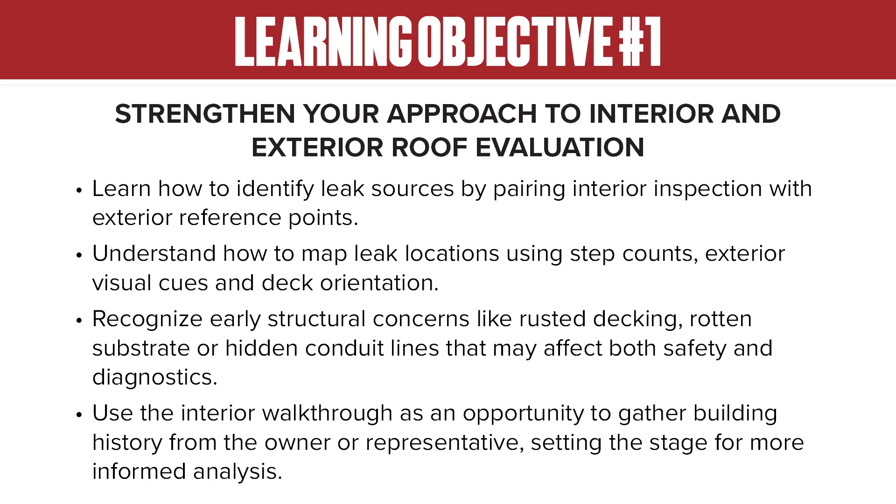So we're going to start with learning objective number 1, how to strengthen your approach to interior and exterior roof evaluation. So Lane, what are the first steps to properly analyze a roof? Yeah, this is the most important part of any opportunity that you may have to go and look at a building. So if someone gives you a call, and this is obviously for existing buildings, and you get an opportunity to come out, typically there's probably a leak or something going on that the building owner has reached out to a contractor or somebody to determine what's going on.

So initially, a lot of contractors may come to the property and they want to go straight to the roof. That is not what you should do. From the get go, you always want to walk the underside of the building first. If there's drop ceilings and things like this, you may have to ask if you could actually pop your head up and pop a ceiling tile. You really would like to see the bottom side of the deck as well.

But during this inside inspection process, you're going to try to determine where the leaks are coming from. So typically, if there's 1, 2, or 3 different leaks, you want to determine that from inside the building, and you're going to walk off in steps from 2 different walls to help determine where that roof leak is once you go to the top side of the roof. So really try to get some sort of visual. You'll have a pad and paper, and you're gonna walk out your steps, maybe 10 steps from one wall, 15 steps from another wall, and you'll put an X there.

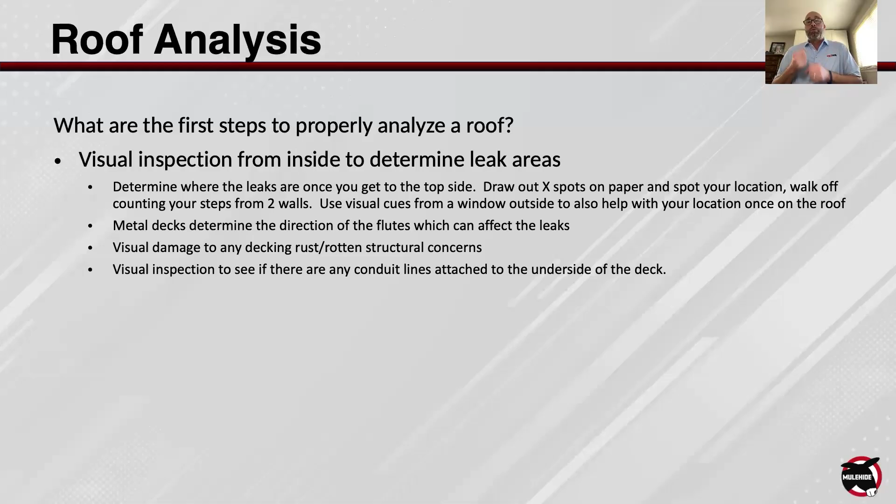So if we're doing some sort of a re-roof scenario, even when we're tearing off and we're going to mechanically fasten back down into that roof deck, the last thing you want to do is run a screw or something through some conduit lines and things like that. Yeah. So these are all the types of things that you can determine before you even get to the top side of the roof. So visual inspection from underneath the roof deck is key, and the first thing you should always be doing. I love it.

That's such good advice. So how do you map those leak locations once they're found? Step counts, exterior visual cues? Some of that internal information you should know. Yeah, that's where the hard part could be, trying to get close from the bottom and then taking that information up to the top. Stepping off from two walls will at least get you close. Okay. The next thing you can do is, if there's a window or door, within the sight lines of where this leak is, look outside a window and try to get an object that you can see from the rooftop.

Maybe if there's a really nice Corvette sitting out there, and it's in the sight line for where that leak is, then that'll also give you a visual. Once you get to the rooftop, you can always look outside, and there'll be potentially a tree, a bush, maybe a sign that's going to help you determine that, hey, I'm on the right line. That's my outside cue. I have my roof steps stepping off from the two same walls. Once we get to the rooftop, we're gonna take those steps from both those areas, and that should put us hopefully within reason to start assessing what could be the issue and where's the leak source.

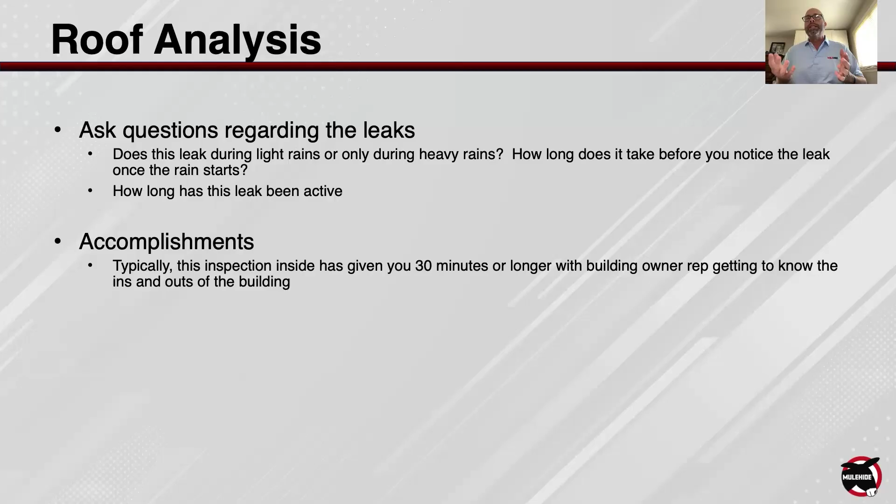Those would be areas where obviously you would see potential signs of rusted metal, rotten decking, things of that nature. So that's easy, but to get a real thorough exam of the entire underside of the roof deck could be difficult. But those are the types of things; again, asking a ton of questions to the person that's walking and escorting you around should give you some cues and signs to determine what's going on with this roof.

And once you've identified the roof deck itself, you should be able to understand and know where you may have those potential areas of issues. Got it. Amazing. Okay. So once you're on top of the roof, let's talk about where those leaks usually are, like around the perimeter edge walls, penetrations, curbs, all of that. And talk about once you're up there, what are your next steps?

Yeah, absolutely. So now that you have all of this knowledge from below, we're going to take this to the rooftop. Now, if you're going just to evaluate a specific leak, then you can simply go leak hunting at that point in time. However, you're up there. You might as well take a look at the entire roof while you're there. And then you can also still do that leak investigation, whether it's 1, 2, 3 leaks, whatever. But ultimately, all roof walks should always start at the perimeter of the building.

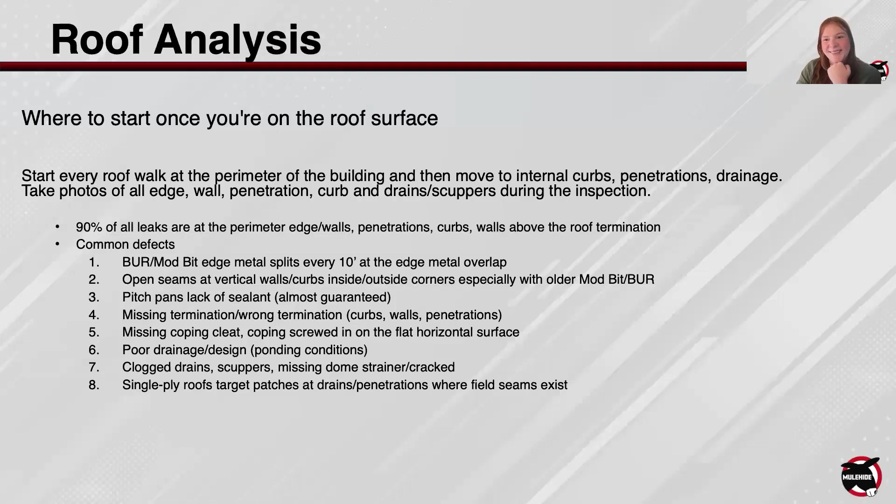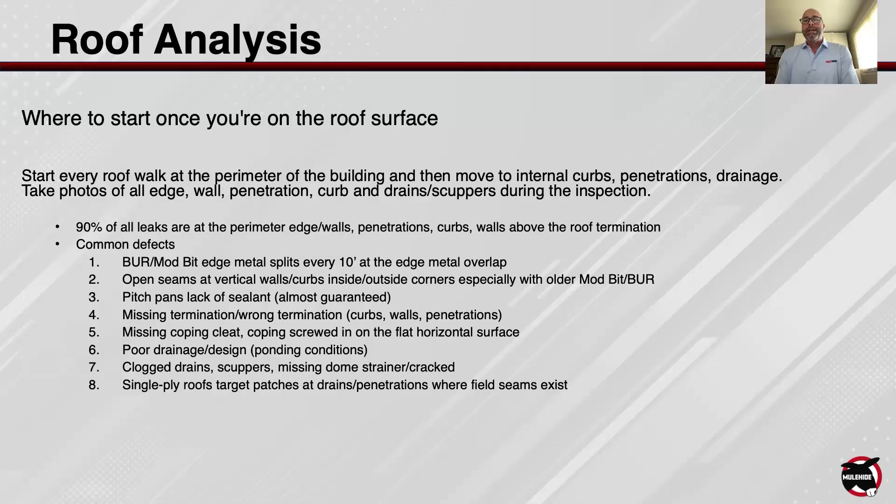Another one that goes along with that is clogged drains. If you're ever on schools, you're going to find every single sort of ball that is out there to mankind, and they all find the drain. So baseballs, soccer balls. The soccer balls are not going to go down the drain, but the big old school rubber balls are up there. I mean, you'll find any and everything. I recently heard about someone finding a raccoon in a scupper. Sure. Any and everything. It's amazing what you'll find up there.

So check those. The easiest fix there is to fix some things, but a lot of times it may just be the strainers themselves, the domes. Those are simple and easy repairs. Again, we're just pointing out potential issues. Some other things, again, more universal in terms of manufacturing requirements, but just target patches at the right areas where they're needed, things like that. These are all pretty typical, but there's multiple things that you potentially can find.

Every time you get on a roof, there's a new opportunity. Yeah. And it's amazing what you will find when you get up on the roof. We've seen full-blown gardens growing up on the roofs, right? So just be prepared for anything once you actually get to the rooftop.

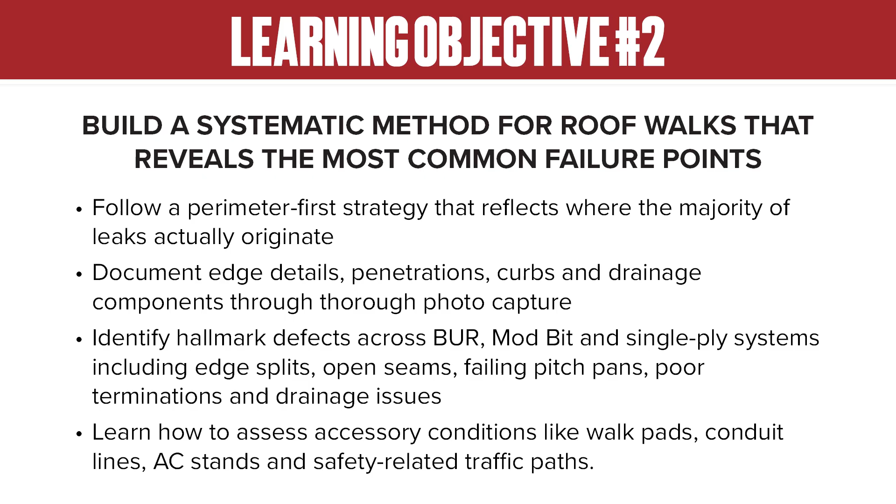Absolutely. And that's all a part of Learning Objective 2, which is building a systematic method, but like Lane, you just said, you can have that systematic method for every roof walk, but there might always be something new being thrown at you that you're adding to that method. You're adding to that list of things to check. So once you've walked the perimeter, you kind of have your system and your method down on that aspect. What's next? Yeah, so now we're going to move more into the field of the roof.

Got it. And there's all kinds of potential issues there as well, but this would be more related to the membrane itself or just potential little details that you may notice. Again, typically you're not going to find leaks per se in the middle of the roof. If the install was done correctly, you're typically not going to find that. But you can still find potential issues with the existing membrane, whether it's a built-up roof, gravel, modified, existing single plies, whatever.

So some of the things you're going to want to look for there is if it's a built-up roof or gravel, look for what's called crazing and or cracks, open seams, punctures, blisters. Again, you could certainly get tears and splits in the field of the roof.

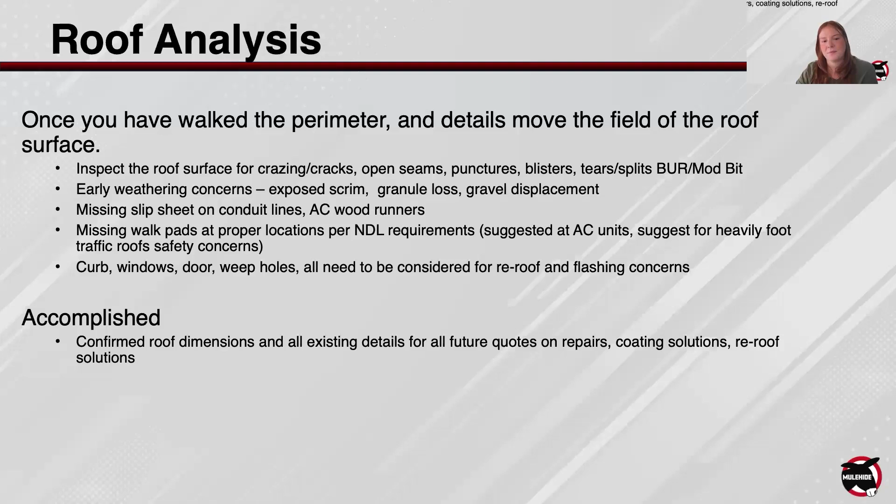I have been up on many gravel built-up roofs. The problem is you cannot see what's underneath that gravel. Right. So if you did the proper inspection from below and you've got your identified leak area and you get up there and you are in the field of the roof, you have to be cautious here because you don't want to create any more damage.

But in order to find a leak, you may actually have to do a little bit of spudding or removing of that gravel and really get down to see what's wrong with that existing membrane. And I found splits within built-up roofs that are 6-7 feet long where the membrane is just literally opened up there for whatever reason. You're never going to see that unless you displace that gravel. Okay. So these are all things you can do.

In terms of membrane, whether it's early weathering concerns, exposed scrim, granule loss on modified, gravel displacement on old school built-up roofs. If it's single ply, typically, if the roof's lived its life and it's 25, 30 years old, it's obviously done its job. It's ready to get replaced. Okay. But if you're on a newer single ply roof and something doesn't look right, then there could be some early weathering issues with that particular membrane. Things like that may happen.

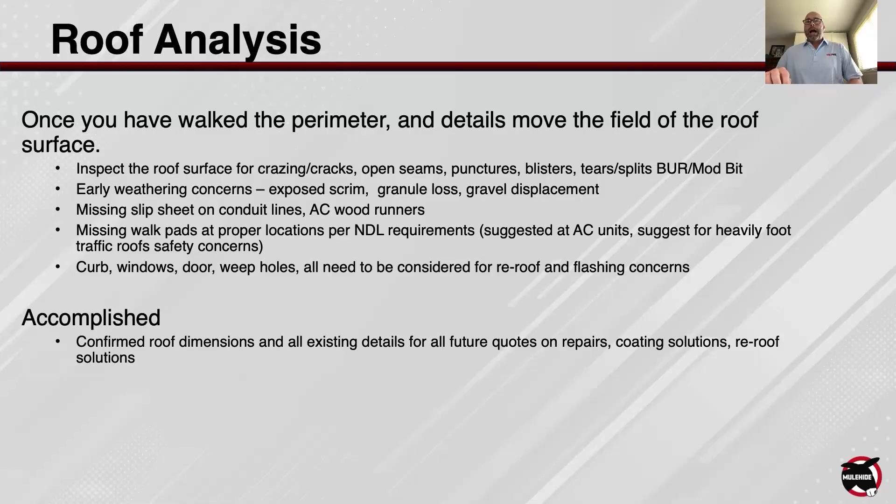I live in Texas, so walking a roof in July, it's not fun. And so most building owners are probably going to say, have at it, and then you come down and tell me what's up. So again, there's a purpose for all of this. And at the end of the day, what you're trying to do is make sure you have all the critical information that now will allow you to start talking solutions. So that's what we've accomplished by doing these 3 initiative walks, if you will: inside, perimeter, field.

It's giving you all of the potential answers to start talking about solutions. Yeah, that is so great. So we covered, like you said, learning objective 1, which is that interior and exterior roof evaluation, and learning objective 2, which was building that systematic method. So starting at the perimeter, going into the field.

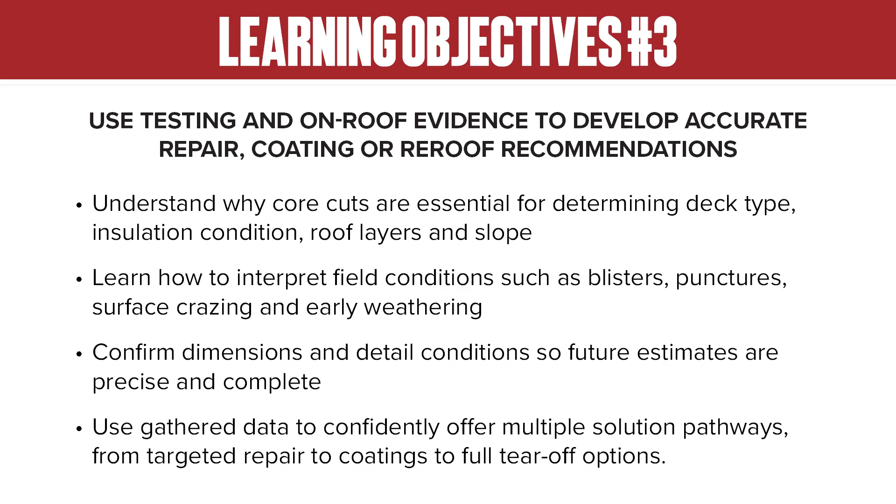And then now we're going to move into learning objective 3, which is using testing and on-roof evidence to develop accurate repair, coating, or re-roof recommendations for that home or building owner in this case. So what are core cuts and why are they essential for determining deck type, insulation condition, roof layers, slope, all that stuff? Absolutely. So with any analysis, a core must be done.

I will urge you to always, always, always be sure you get approval first and ask. You don't want to cut into somebody's roof without approval first. But if they don't give you that approval, then it's going to be hard for you to come up with real good solutions at that point, because it's harder for you to determine what needs to be done, materials needed, and things like that. So when in doubt, most building owners realize that this is necessary, and as long as you repair it properly, you should be good.

So what we're trying to identify here with these core cuts is, again, what is our deck type? So we've done our internal inspection, and we can look from underneath and verify what that is. Right. But you still want to verify from the top side just to make sure there's no anomaly out there or something is going on, right?

Second, this physical type core test will, at a minimum, wherever you take the cores, identify if there's any wet insulation or saturated, if you will. I mean, if you start cutting into a core and literally you get water coming back at you, you can probably stop right there. But essentially you still need to know what's in there, how much, and things like that, because you're going to be tearing all that stuff off.

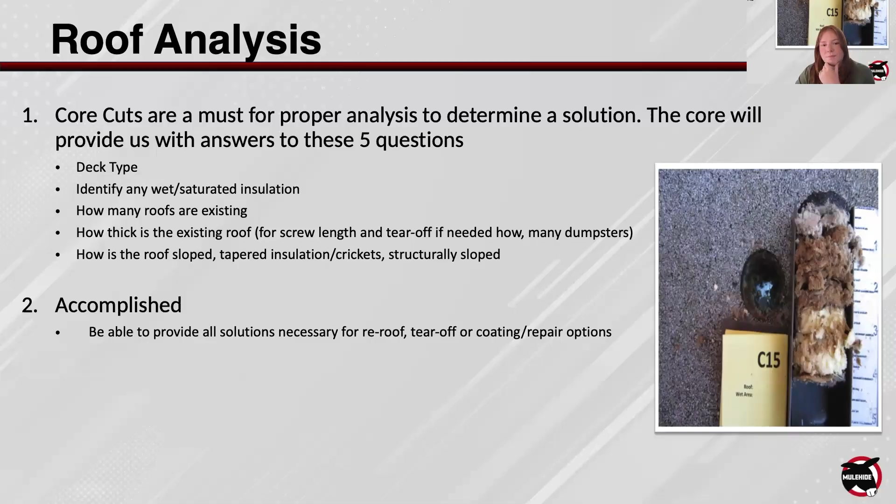So along with your roof analysis, these 2 core cuts will at a minimum be able to give you these 5 criteria that will help you to build whatever that solution is going to be. So it's key that you need to do these to make sure we identify all of these options within the existing roof system itself. Got it. Okay. Huge, massive.

So next, let's talk about blisters, punctures, surface crazing, and early weathering, and what tests can be done to confirm and solve those problems. Yeah. So these pictures are just common potential issues as you're going around looking. Again, wherever you're at, it's hot or it's cold or whatever, these guys are not going to want to get up on the roof mainly.

Right. So put your report together, build these photos in there. So when you sit down, you can show that here's the physical evidence. It's not just me. Here it is based on your roof. Show the core that you took. Show the core cut. I always like to also get the underside of the deck, so you don't just see it.

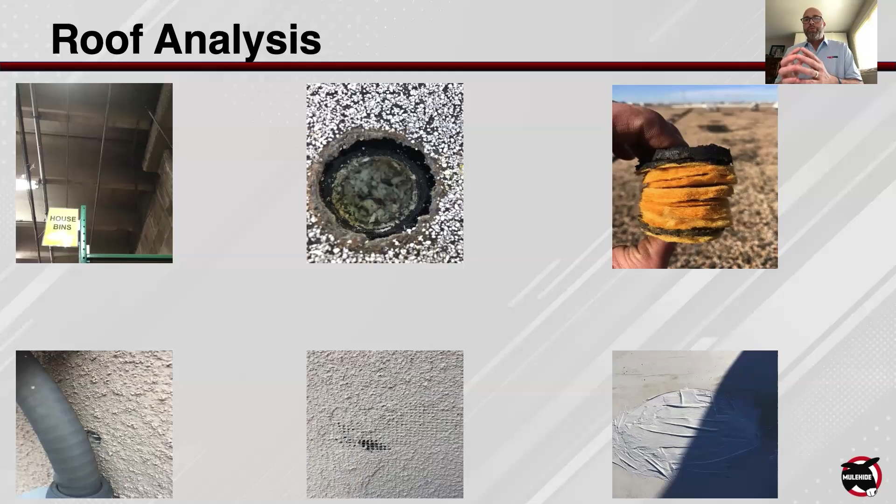Now, a couple of these photos here, you may see this is just in the exterior itself. Leaks can happen, and a lot of times the roofer always gets the call. And doing this as long as I have, a lot of times we go out there and it's something in the vertical wall, or hopefully it's an AC condensation, something like that. Yeah. But these are just all ways that'll show you to look at everything.

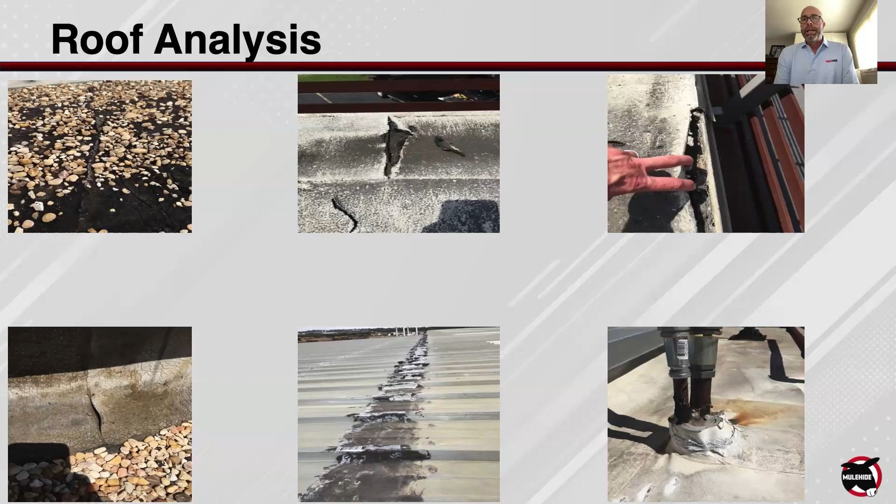Skylight damage. I would love to tell you that your roof's leaking, but no, I'm sorry, you got a crack in your skylight, right? Yeah. So this is something we see all the time too. Again, above the roof. Look, you're up there. If you're a roofing contractor, you're a waterproofer essentially. Yep. You have to understand how the roof meets up against other vertical conditions and things like that.

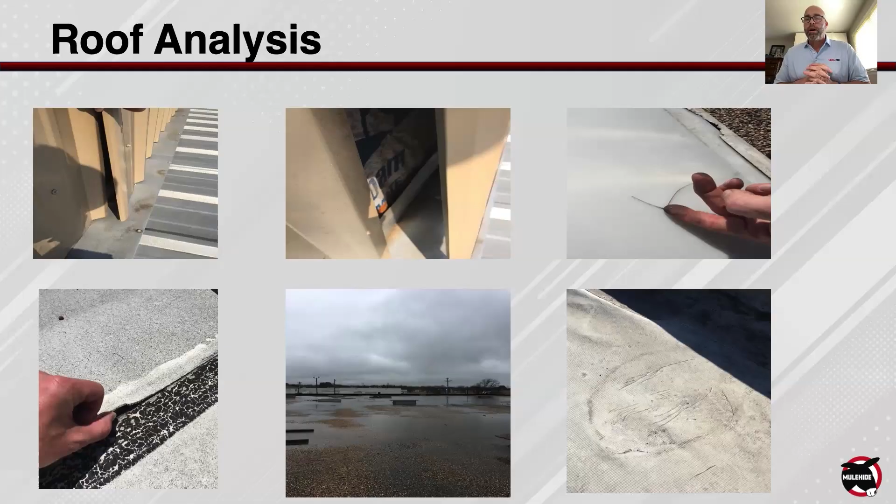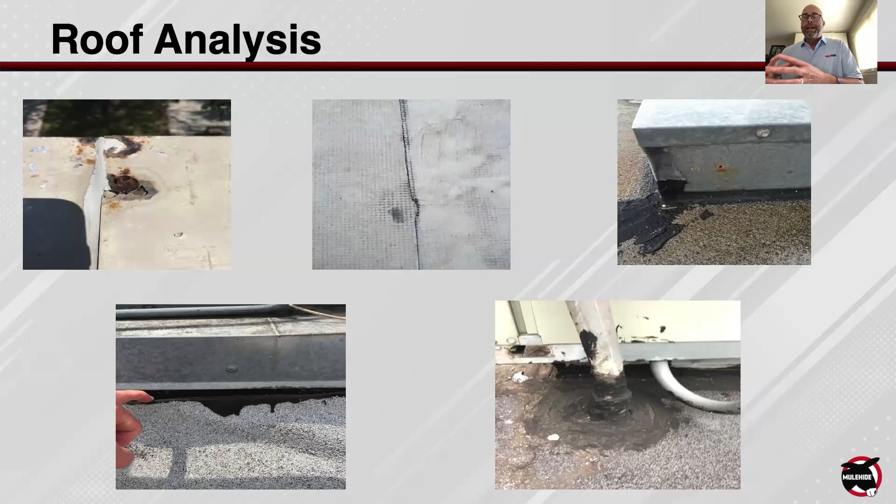And so, pictures say 1,000 words to me. It helps prove your point. And so that's why you always want to take pictures of some of these conditions. And these are just some of the more common ones that you'll see. And again, everything builds a case to help you identify what is our solution moving forward. Again, I mentioned above roof conditions. So tilt wall construction. This is very common where there's large concrete buildings where they tilt these walls up.

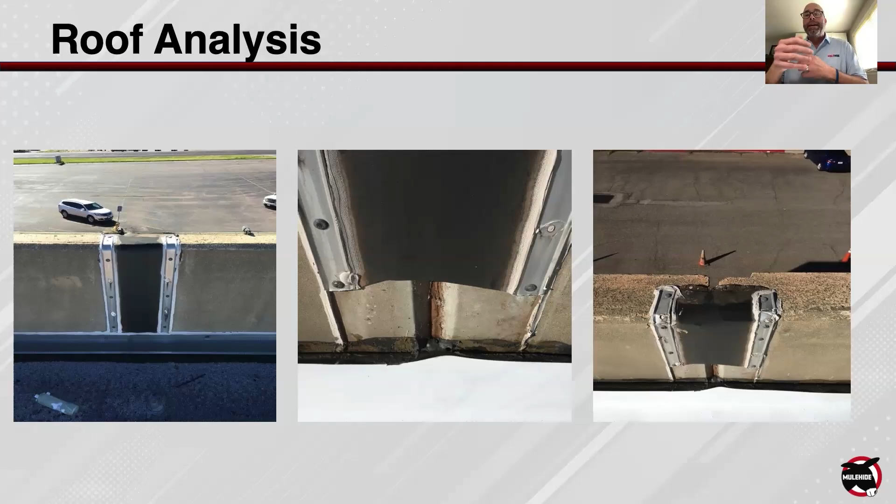This is just a repair I found unique, whether it's right or wrong, it was a photo I like to share. That's how they tried to address this, by putting some EPDM and term barring it so that they didn't have to go in and remove the existing sealant, potentially swap out the backer rod that's behind there, and do it right. Again, you've got to do what you've got to do to stop a leak, but look at all of the conditions above your termination if you're a roofing contractor, because you're going to get blamed for it anyways.

So while you're there, you might want to always look at touching up control joints, making sure your termination, surface mount counter flashing, and term bars are all caulked properly, and things of that nature. Yeah, absolutely.

So, just to round it all out, we went over our three learning objectives, which were: one, how to strengthen your approach to a roof walk, a roof evaluation, through interior and exterior evaluations; then build that systematic method for roof walks that reveals those common failure points through the perimeter first and then going into the field; and lastly, learning objective 3, use testing and on-roof evidence to develop that accurate repair or re-roof recommendation for that building owner or building rep.

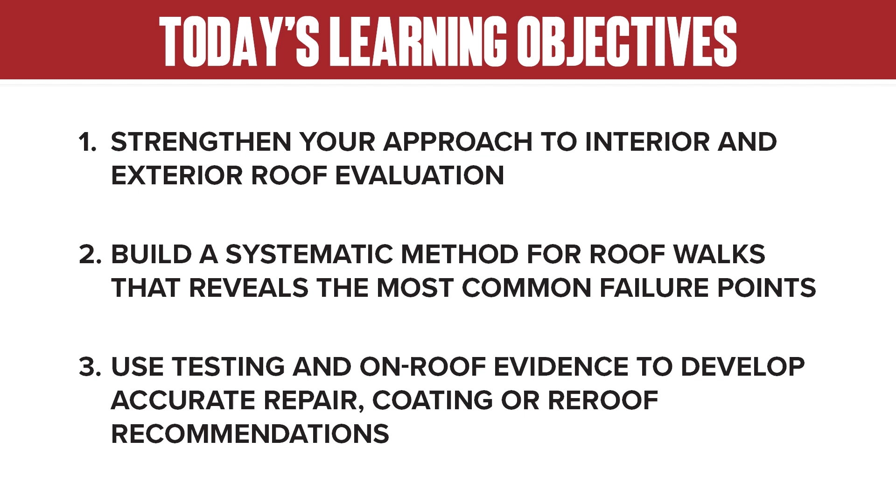So, Lane, thank you so much. This was so informative. Any last words or pieces of advice to the people watching this Lunch and Learn on their next roof walk? Yes.

The other thing that I always want to say is there's destructive testing and non-destructive testing. The core cuts obviously are what would be determined as destructive testing. That physically is going to give you some information. If you're thinking about doing a re-roof scenario, I would still do core cuts. You're always going to want to do core cuts.

But another method would be doing an infrared moisture scan of the existing roof. That's where they can come in and determine whether or not that existing roof system's holding water. They can mark that out, and it'll give you the opportunity to, at a minimum, determine I can still re-roof this project, but I may need to address 10% of this existing roof and cut out the bad areas that are holding that moisture. We're going to backfill it with like kind and thickness, and then we can re-roof over the top of that.

So having an infrared moisture scan to go along with this inspection really gives you bulletproof information to take to your building owner and allow him to make the best decision for his building. So that would be the other type of testing that you could always do to help back up your roof walk.